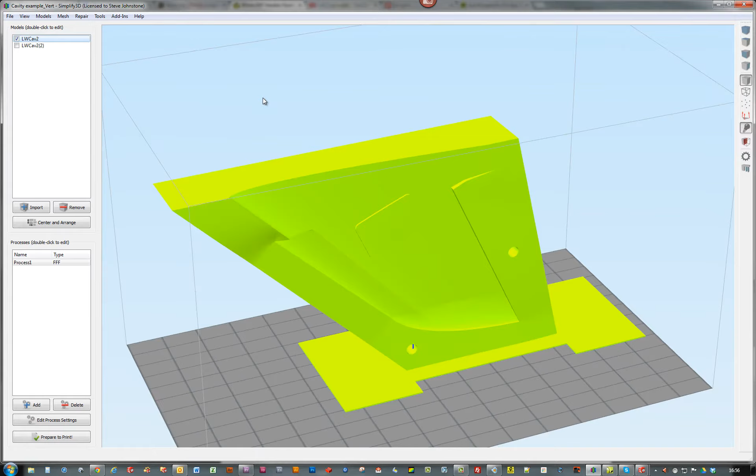And what I'm going to do is I've set it up to print at a really high layer height, just so I can highlight hopefully why we print in this orientation.

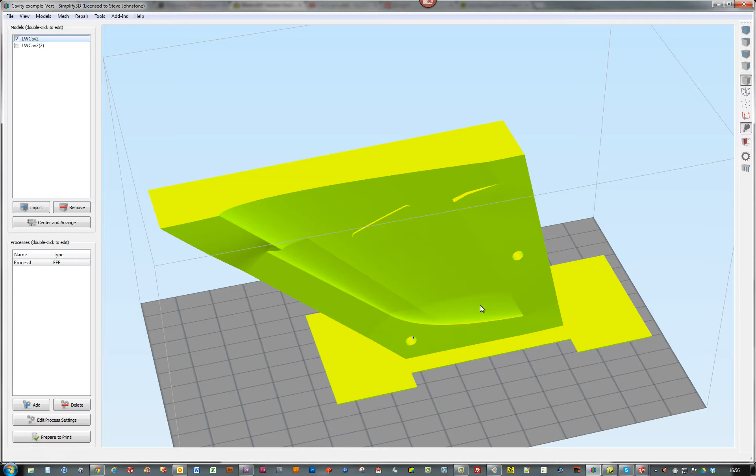Basically you can see this is the part that comes in from the STL, a representation of the STL from the CAD package. You can see how nice and smooth these surfaces are modelled, and what I'll do is prepare this to print.

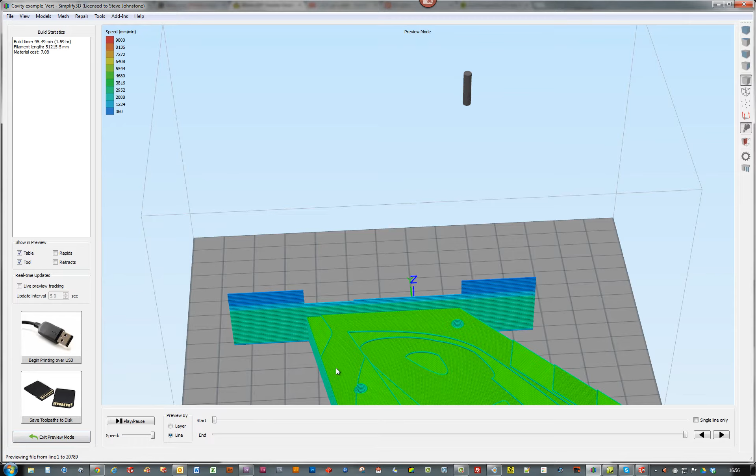This is basically the way the slicer works. Okay, I'm just going to pause and get this ready. Okay, so I've looked at the simulation of the toolpaths that Simplify 3D will send to the printer.

Like I say, I've actually set these layer heights to be 1mm, which is way too high, and I couldn't actually print them at 1mm layer heights on my printer if I wanted to. So I'm just over exaggerating the point really.

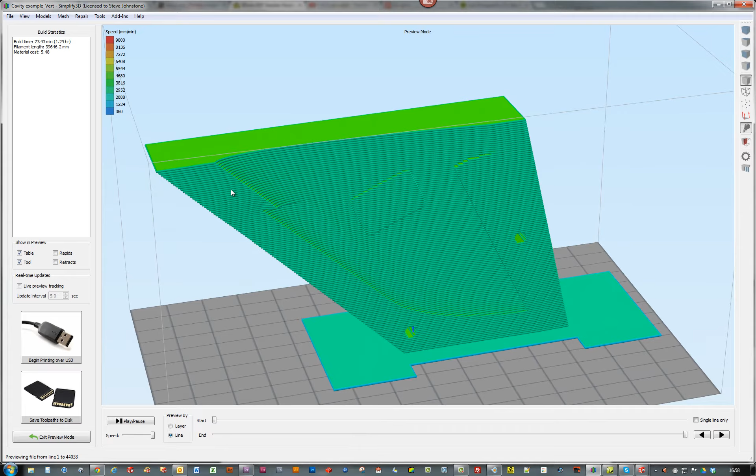So what you can see here is the printer will start at the bottom, and it's going to work its way up. So if we play that, that'll be fast enough. Okay, great.

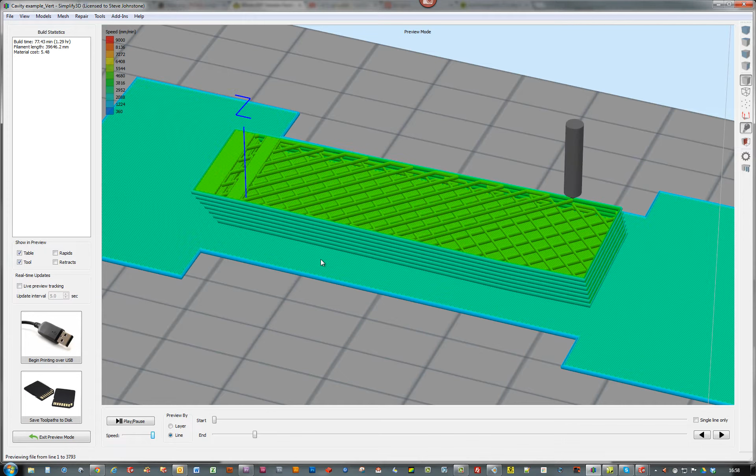Okay, so what it'll do is come around, its infill. So it's gone around twice, printing in these sort of profiles. Now as we go up, you can see how nicely it follows the wing profile here, going up every 1mm layer basically.

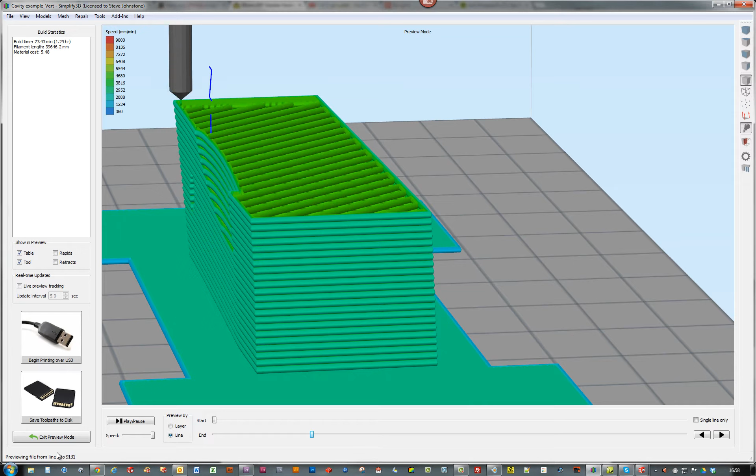So let's look at this angle, see if I can do a cross section through there. Just hold on. Okay, great. So basically I'm doing a cross section through the x-axis here, and if we look in, you can see the offset from one layer to the next is very, very close.

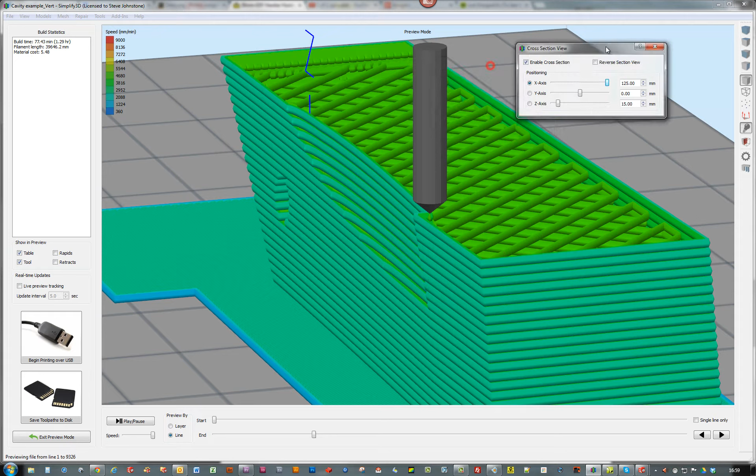Yeah, so it's going to be marginal. The stepping of the layers is going to be really minimal as it prints and as it goes up. So when we come to sand this out, there's very little material we actually need to remove. I'm probably not explaining it all that well, but hopefully the next example will make more sense.

So that will go through and print up the part, creating a nice profile. Like I say, this is exaggerating the point. Okay, so over here we can see some stepping.

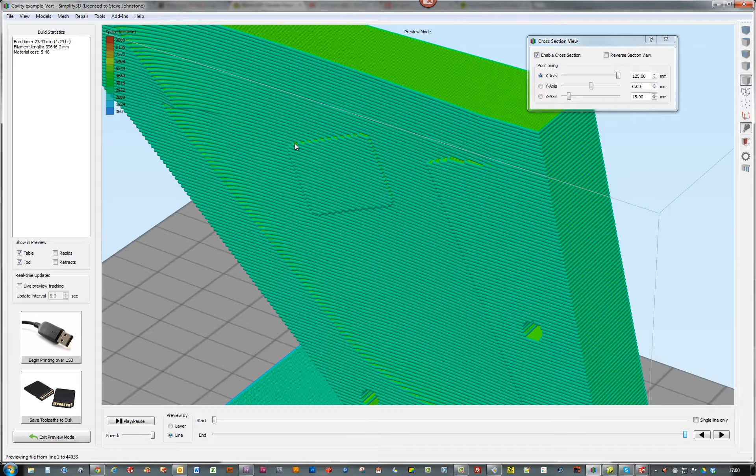Okay, so it's this sort of stepping that I'm referring to, and in this orientation it's marginal. Obviously the smaller the layer heights, the less you're going to notice that stepping. At 0.1mm, you'll hardly notice the stepping on that edge, and you won't notice it on this edge. But like I say, this is at 1mm layer heights.

Okay, so what I'm going to do is load up the model orientated flat on the build plate.

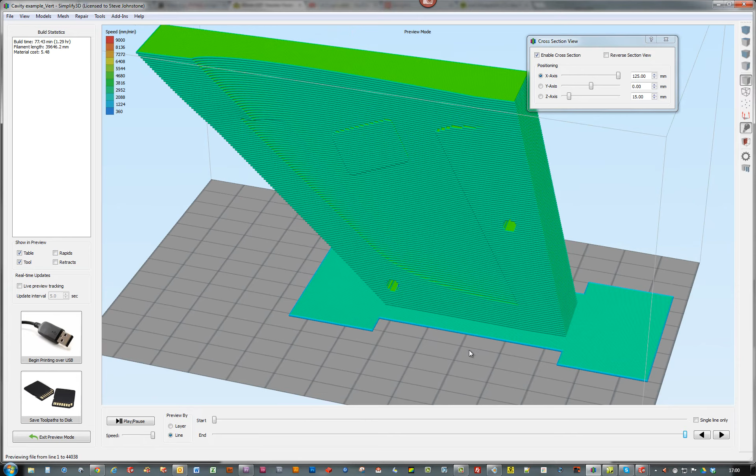Okay, so now I've reorientated the part on the build plate. Okay, and this is actually how I originally looked at printing my parts when I started 3D printing. I soon realised that the actual resolution and the detail is lost when you orientate your part like this, and the reason will become clear in a second.

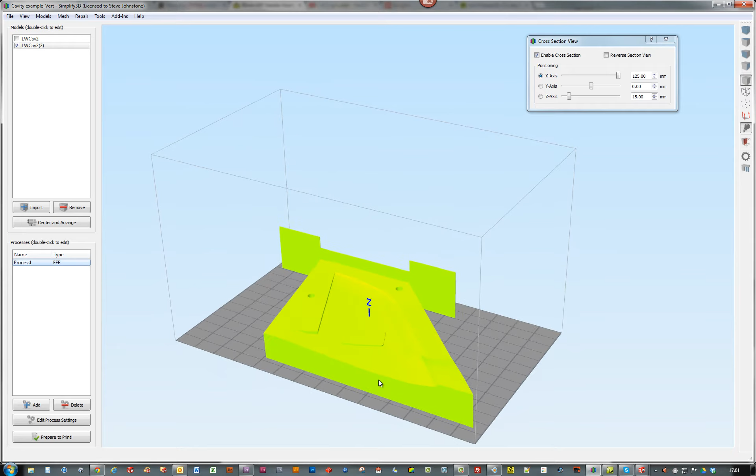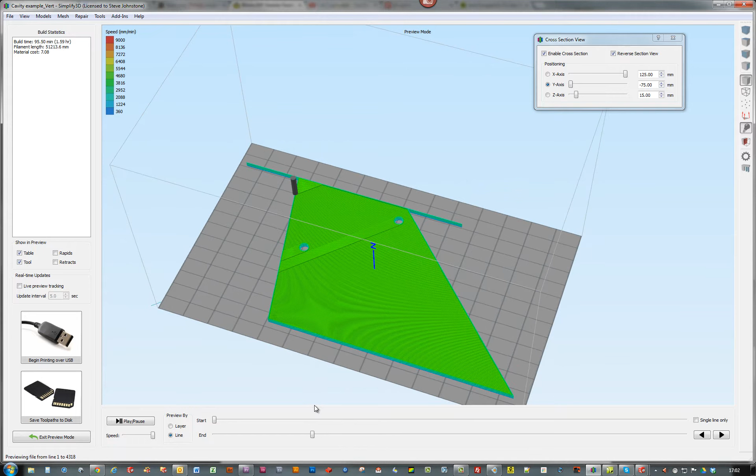Okay, so what we're going to do is prepare to print it, so I'll just pause a sec and run the simulation. Okay, great. So here we are. I've started the simulation. Let's press play, and I'll pause it as soon as we get to something a little bit more interesting. So off the printer goes, it's printing the bottom layers. Okay, so start the infill. We're going up, up, up until we get to the surface layer of the wing mold.

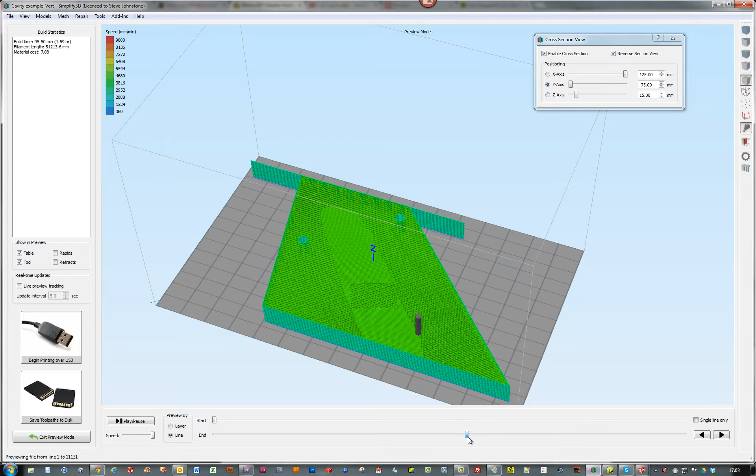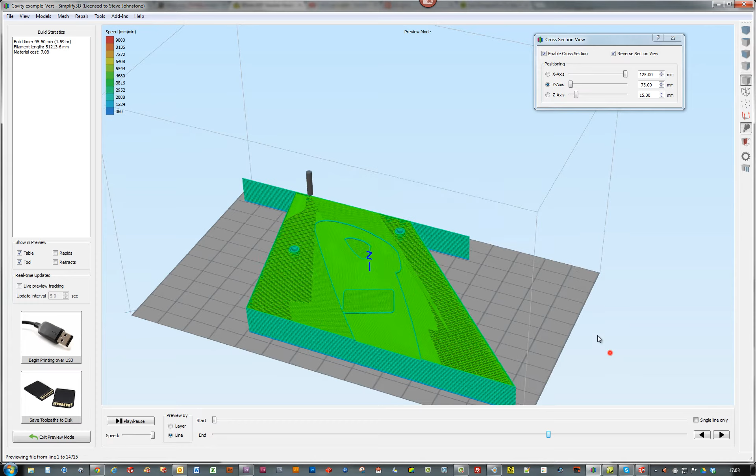Okay, so this is going to be the lowest point on the cavity part of the mold. Okay, when we print the next one, you'll see. There we go. Okay, so it's printing. So it's done a big step, as you see, because imagine all these faces are flat, horizontal, and parallel to the build table. Okay, so that's one big flat surface. So that's a flat surface there now. So we've lost our airfoil in that section, and it's just a flat surface with a step.

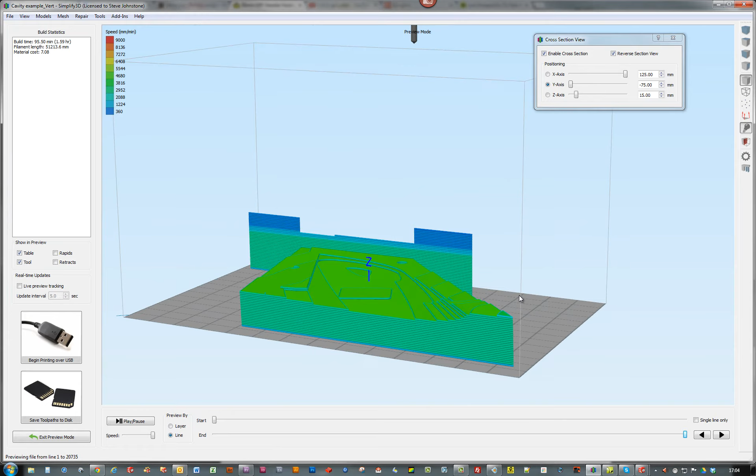Now as it goes along a little bit more, okay, and then we've got another flat surface here now. So at the moment we've got one step. So stepping from there onto this step, and then it'll do another. Let's have a look. Okay, there. So it's tiered it, if you can see what I mean. Oh, there we are. That probably shows it really well over here. Okay. So all these are flat areas. So that's flat. Then steps up. There's a flat. Steps up.

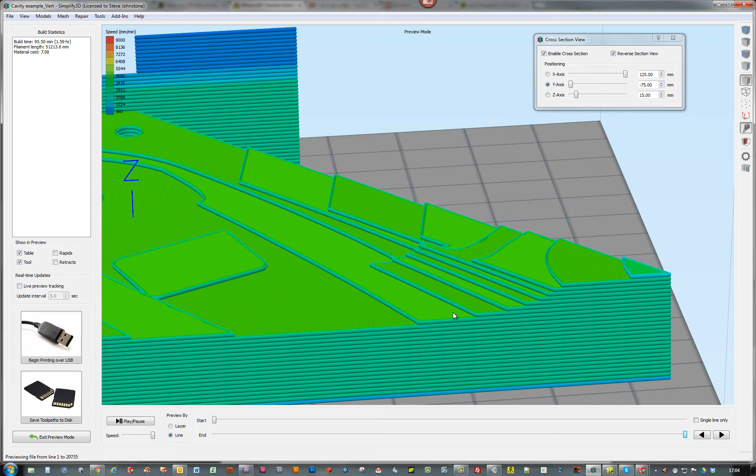So we've actually lost our really nice airfoil shape, and you could sand it out. You'd have to fill basically this triangle here and this triangle here to get your airfoil back. So let's go and cut into it a bit. Hang on. Let's see if I can show you. Oh, there we go. Hopefully that looks like something out of Minecraft. If you've ever seen the game Minecraft, the kids play it, and that's what we've ended up with.

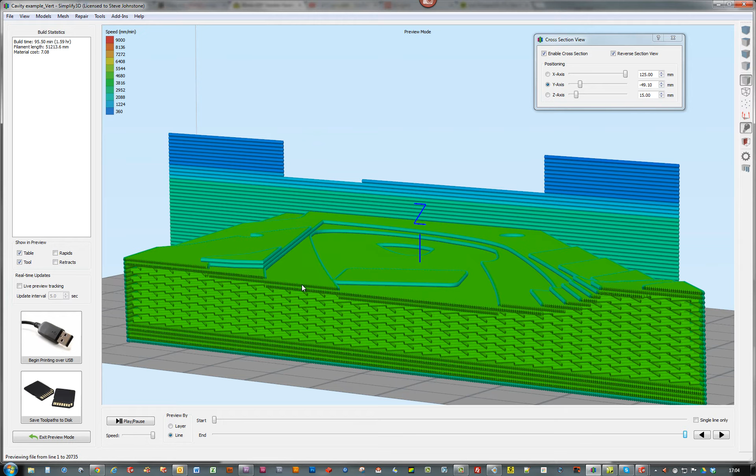And like I said, this is exaggerated because I've done this at 1 millimeter layer heights, but even at 0.1 millimeter layer heights, you're still going to have big areas of flats. In fact, I'll just put it at 0.1 millimeter layer heights, and then we can show you that we're still going to have these big areas of flat material, flat surfaces that obviously we don't want in our wing section. We need a nice airfoil. So let me just change it up a bit.

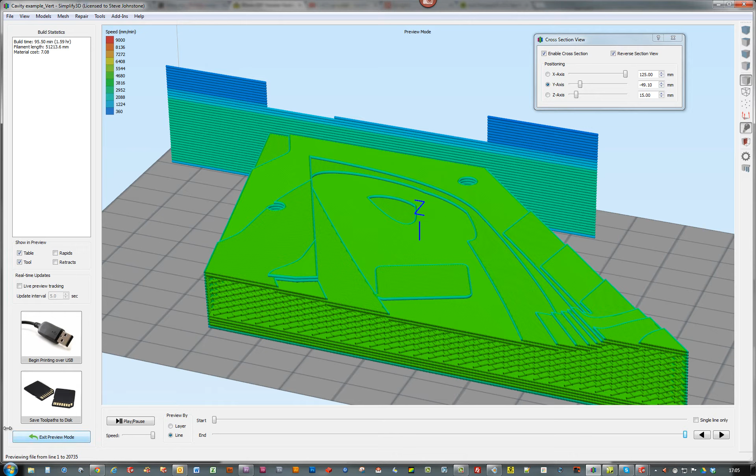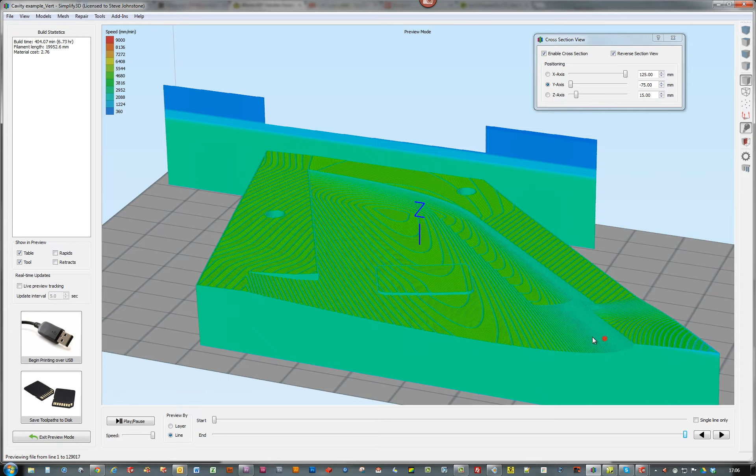Now as you come to the edge here, you could probably get away with it. See, this is negligible. You can get away with that. But where you've got a really shallow concave or convex surface, like the top of a wing, you're going to end up with these big flat surfaces, which you really, really don't want.

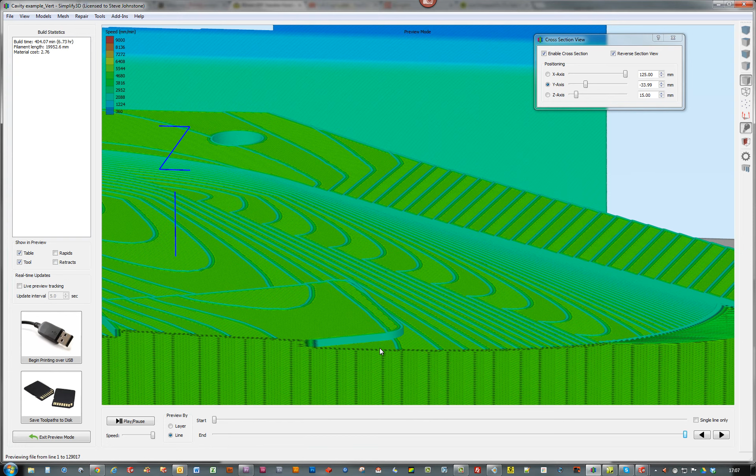Let's do a cross section through that. Ignore that because that's for the servo hatch, the servo access. So as you can see here, we've got flat surface, then a step, flat surface, then a step, flat surface, then a step. So lots of flat surfaces.

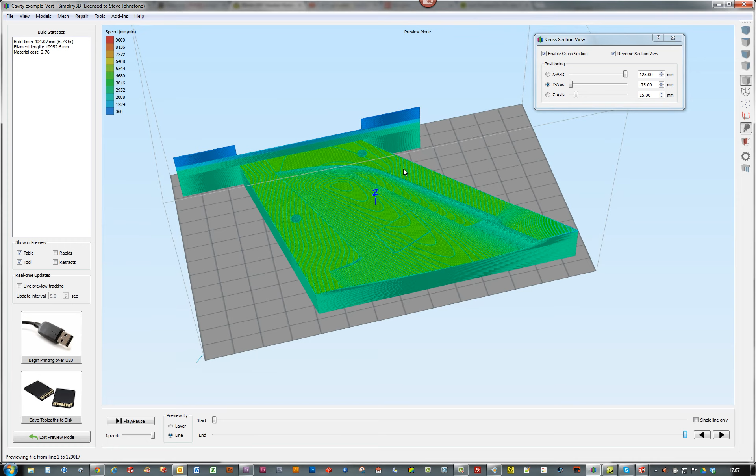Okay, so hopefully that explains a little bit better. I mean, there's no way I could have actually written an answer to this without spending ages. So hopefully that's answered your question.